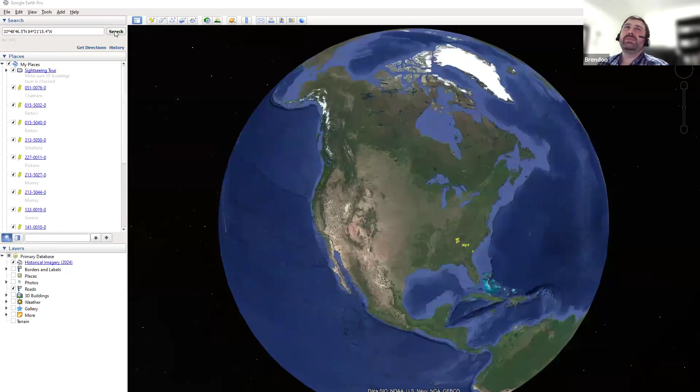So I have about 7 years experience now. Basically do bridges for a living. So I'm going to take you through a project that I did back in 2022, only about 2 years ago, when my previous company got a call from City of Atlanta when a bridge was on fire. I guess both times. So Cheshire Bridge has kind of been a lovely little part of my life that I keep getting paid for over and over. I'm going to take you on into Cheshire Bridge. If you don't know where it is, it's on the northeast side of Atlanta, kind of in this location.

Of course, this is the finished product. You got a lot of businesses here. The main thing that's kind of different about my structural engineer experience is I think about the whole site and the impacts on the community that follow, as compared to vertical construction or vertical structural engineering, where you think more about the building itself. I think about the site and everything that's included. And unfortunately, that includes weather events as well as people.

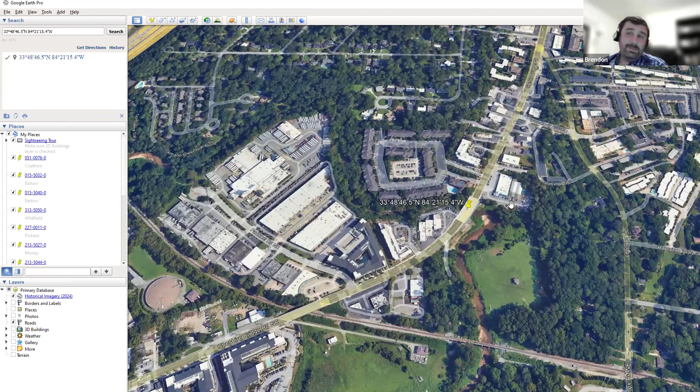So a couple things when you think about a bridge design are the different impacts you're going to have. For example, on the side you have some businesses, you got a little greenhouse for Pike Nursery. You have the EPA right here with their different sensors and systems in place for flood control. You have schools up the way, hospitals, public agencies like firefighters, police force. And you really want to make sure your design accommodates your community. So definitely not structural analysis, but keeping that in mind was the big thing. City of Atlanta came to us basically saying we need a bridge ASAP, it just burned down.

And when a bridge reaches about 4,000 degrees, it kind of melts everything in between. The previous bridge was from about the 1930s or so. It was supposed to be replaced in the late 90s. This one, of course, is brand new.

Due to funding and grants and such like that, we went ahead and said, we're going to replace this bridge, close the road, which was not super preferred, but we couldn't really save the structure that was on fire and do the whole loads analysis and everything like that.

This was technically a design build project, meaning that you design it and build it at the exact same time. On the engineer side, it's a little bit tedious because you have to design it from the ground up versus in a traditional design, you design it first, then you bid it, and then you build it. So instead of a top-down design, you have to design from the bottom up.

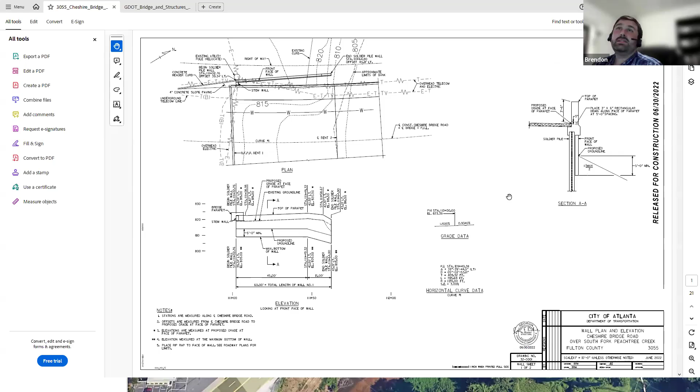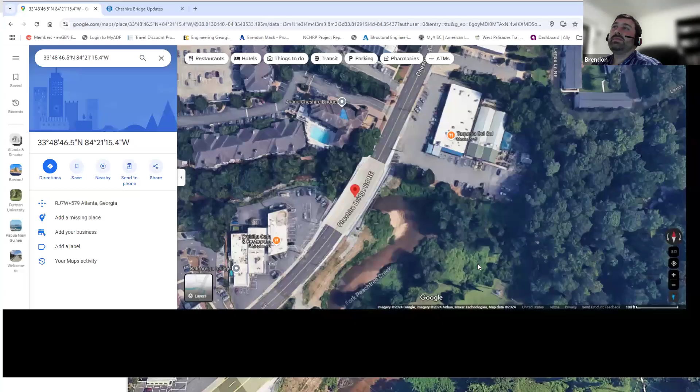So I'm gonna show you the plans. All right, so at the end of the day, you kind of have to think about your span arrangement. You kind of have to go over the creek bed. I'm just gonna grab a different map. So when you're doing a typical design, you want to think about, can you span the creek? Also, the Environmental Protection Agency says that we cannot put piers in the water if we can help it. So we do have to span that.

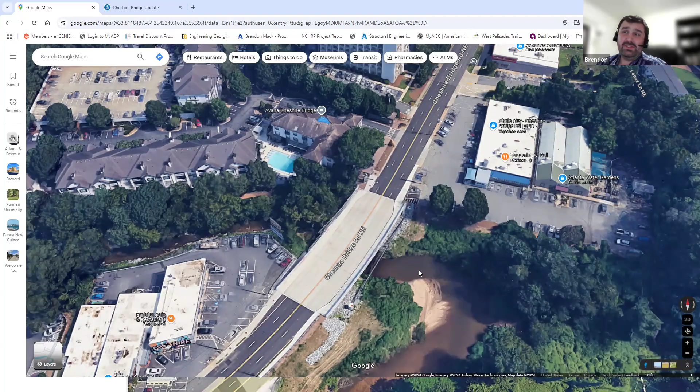Another type of engineering that we do have to conduct in this analysis is a hydraulic analysis. So thinking back to your fluids and your hydraulics, you have to think about conduit flow. Is it turbulent? Is it laminar? What's the effects? If this area floods, where does it go?

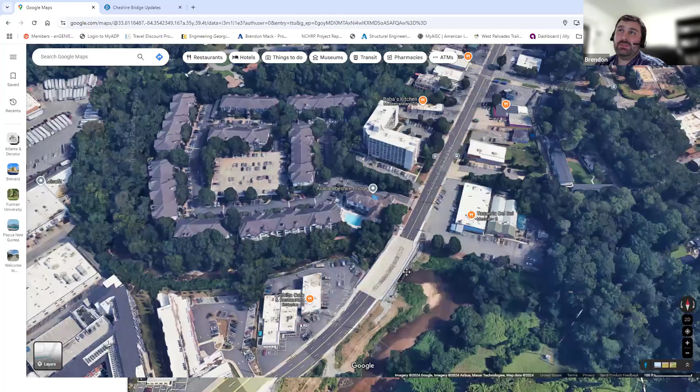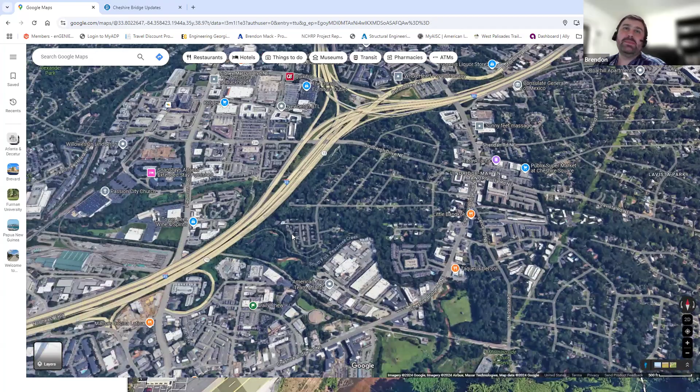So if you zoom out a little bit, and I'm going to change it to, here we go, I'm going to do the terrain. So if you look out at this thing, this is South Fork Peachtree Creek. You have the creek running down this way, and you can think about when this thing floods, how's it going to react? And you have to make sure as a structural engineer, when it floods, concrete, of course, does great underwater. Don't get me wrong, but what doesn't do good underwater is the cars that go over it.

If you think about bridge engineering, you're making a fancy table for cars. So at the end of the day, your Hot Wheels, as a little 5-year-old kid going across the table, can handle it. If you flood the bridge deck, the cars are probably going to go wild. So you got to make sure that the bridge is above your 100 or 500-year storm. So a little background history on it.

That was on purpose. This isn't a seismic zone for City of Atlanta. Also, the soil was not that great either. Most of the Piedmont region is just not that great because as the creek is washing through, it's washing away all the soil that actually protects your foundation.

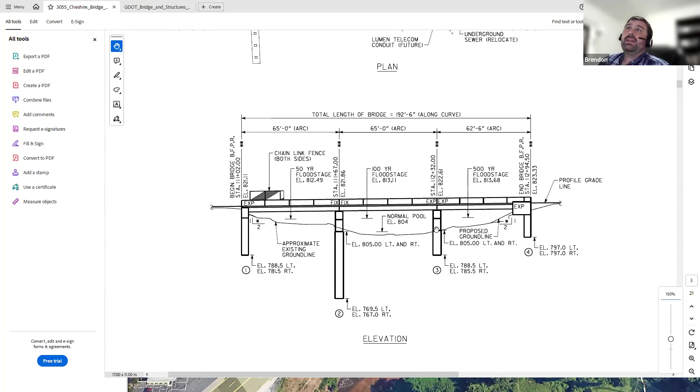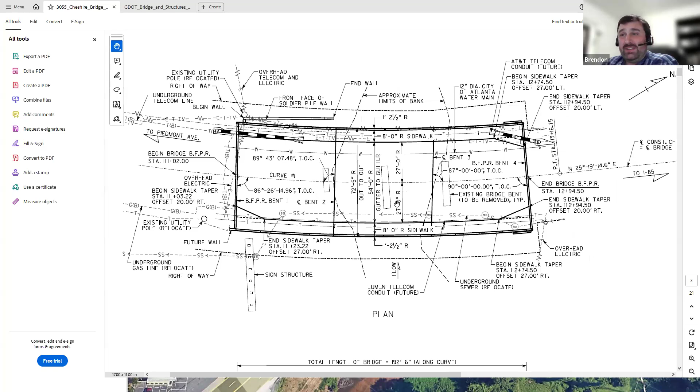So, just to go over the creek, I know this is a lot of little lines and call outs, but this is the approximate banks of the creek. We tried to ensure that we were outside the banks or at least close enough. Because this was design build and we had to make a fast decision within 4 or 5 hours or so, we made a 3-span arrangement. At the end of the day, this could have been a 2-span or a 1-spanner and just go really crazy and boost the road up. But in that case, it just didn't happen.

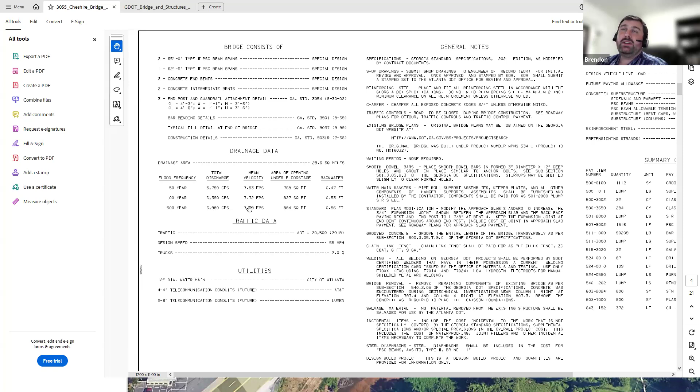Furthermore, there's some more general notes of your facts and figures. You have your bridge consists of drainage data. You have really lots of different other things going on. This is kind of like back to your hydraulics class, your 50, 100-year and 500-year storm.

Formerly, this used to be called the infinity storm. This is your worst case scenario. You have your discharge rate, you have your mean velocity, all that stuff. The model that I'm about to show you does include that. Just for that worst case scenario, if everything gets flooded, then you're completely still okay.

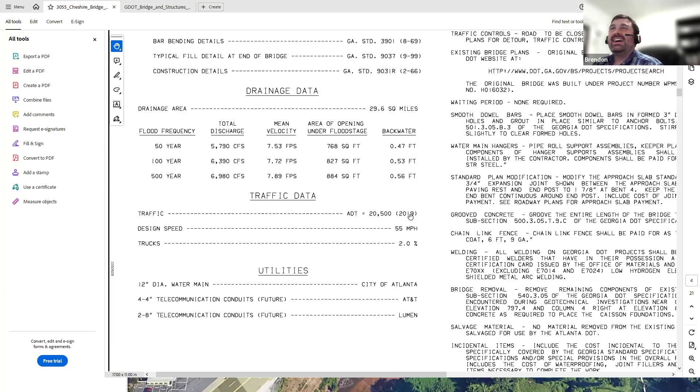This is the traffic counts from your traffic engineers. Since you're civil, you're going to be dealing with all types of civil. So your project partners are probably always going to be project partners in some kind of way. We posted this at 55 miles an hour. Probably should have been 45. Do people drive more like 80 miles an hour? Yeah, that's up to them.

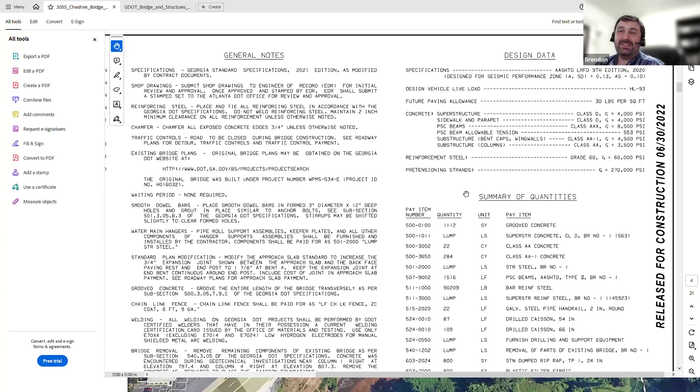Fun fact of the day, if you drive your car along a bridge with a barrier, you are only protected up to 45, 50 miles an hour. And if you drive over 50 miles an hour, it's not ensured that you'll stay on that bridge deck. Just letting you know. So just go the speed limit if you can.

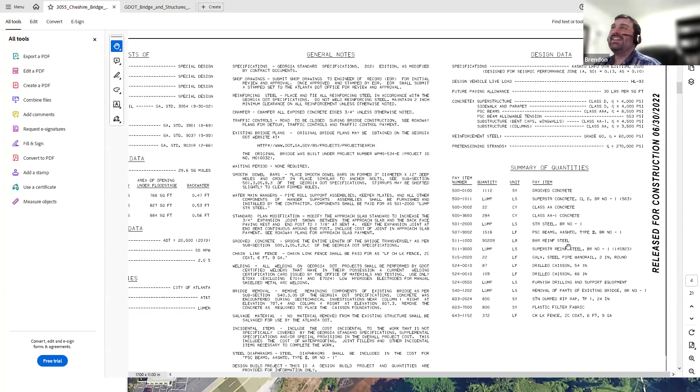And then all your different notes telling the contractor what to do: what specifications to have, shop drawings, reinforcement steel, what type, clearance of steel being 2 inches at all times. That's just kind of a rule of thumb. Existing bridge plans, dowel bars, groove concrete. There's a chain link fence on this. Make sure people don't fall off.

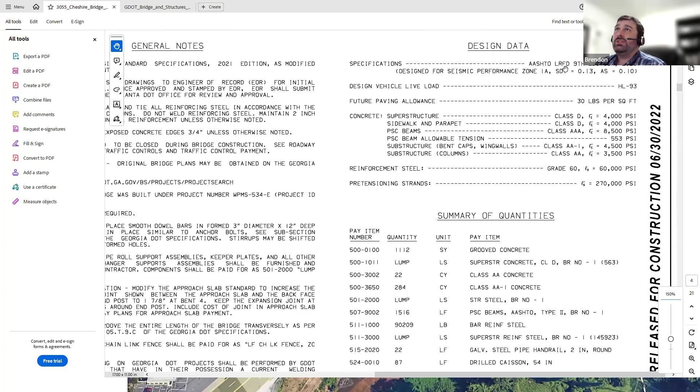How do you weld? You should have a certified welder from Georgia, nowhere else. Yes, we are taking out the bridge. No, there's no salvage material, et cetera. And a little bit of quantities that, of course, can change. And then what kind of concrete we're using in our design. So we specify this way ahead of time.

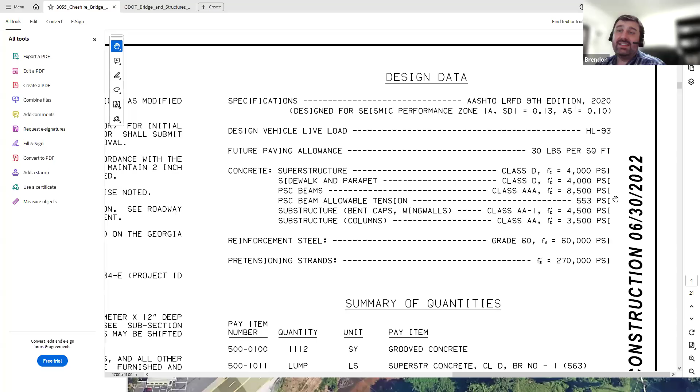And we tell you that, yes, your superstructure design, meaning your beams from your bearings all the way up to the bridge deck, is 4,000 PSI. And then, of course, everything below has a different specialized design. Your reinforcement steel in bridge world is always going to be 60,000 PSI. Your pretension strands are always going to be 270,000 PSI, just for this type of design. You do have to keep tension in check because our strength, no pun intended, is going to be compression.

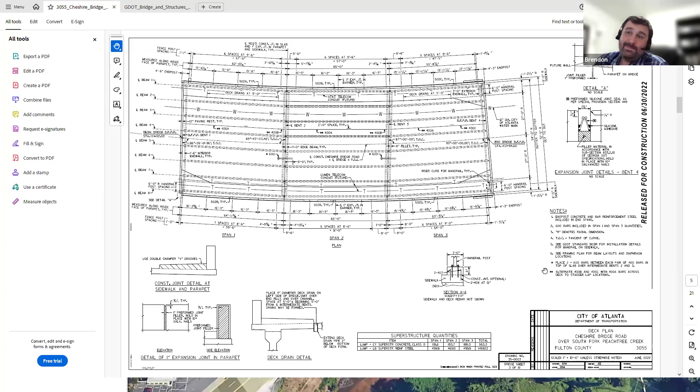So this is kind of your little layout. Again, you're making a fancy table for cars. So how do you do that? You put beams across the bridge deck. Not to get into too much, but we kind of have to tell the contractor everywhere everything goes. This one was a little complicated because it's curved. On a bridge, everything is unfortunately curved on the geometry, but everything is straight underneath. You can't make curved concrete, unfortunately. You can make curved steel, although.

So this is kind of our typical section. If you think about a typical section, I think of it like French bread at the Publix bakery. You take a little slice out, and there you go. You're looking at it. It looks great. It's ready for butter and peanut butter. I'm a peanut butter fan. So you kind of look at it.

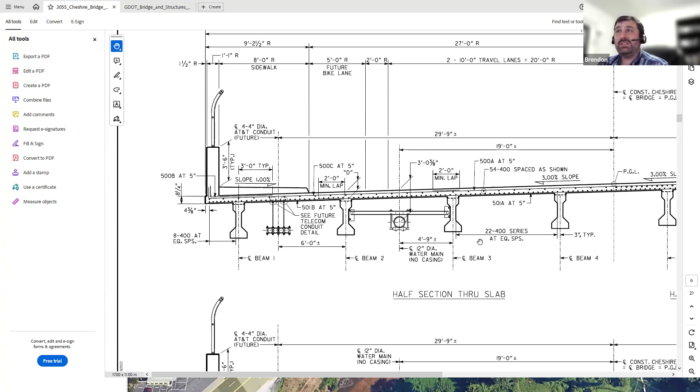We're detailing out a couple different types of utilities. On this bridge, we have a 12-inch water main, and then we also have future conduit. In this situation, we had telecom. We just put conduits out. Hopefully they'll put it in one day, but we just had to accommodate. So sometimes you have to accommodate for future use.

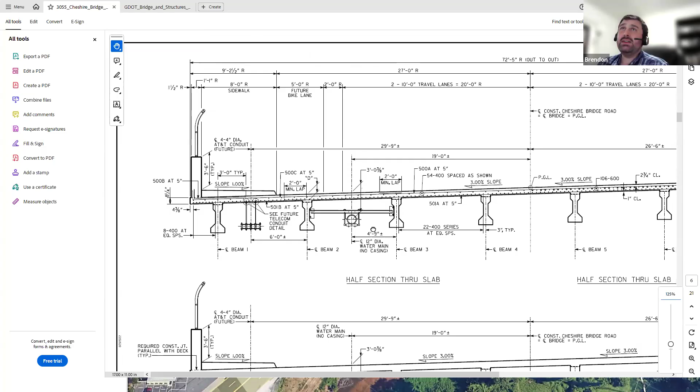City of Atlanta definitely wanted an 8-foot sidewalk with a bike lane or a shared shoulder bike lane on the side. That's just kind of for future expansion later with the Atlanta Beltline coming through. And of course, your typical two 10-foot lanes on each side to accommodate traffic due to over 50 miles an hour. We have to do that. That's from the AASHTO Green Book. So if you're over 50 miles an hour, usually you have to have 10-foot lanes, at least. Highway is, of course, 12-foot.

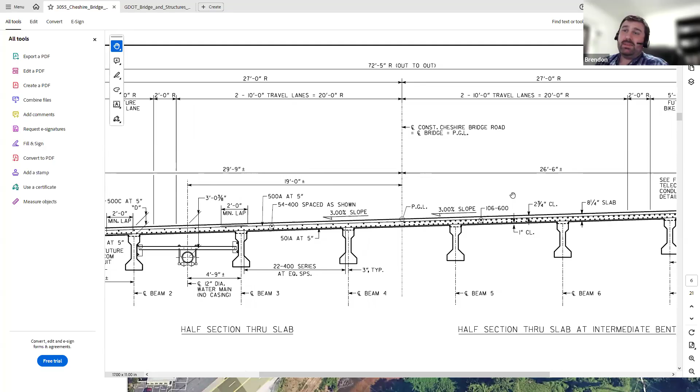Same thing on this side, same exact thing. Symmetry is your friend when you're doing a bridge, especially bridge analysis. So if you can do it once, you can do it once. If you do it 3 times, probably not going to be that efficient in your design. So any way you can make it more symmetrical, the better.

Of course, in this one, this is a lumen conduit. It's a little telecom as well. Don't know why they just wanted inserts that way. So to this day, I have no idea.

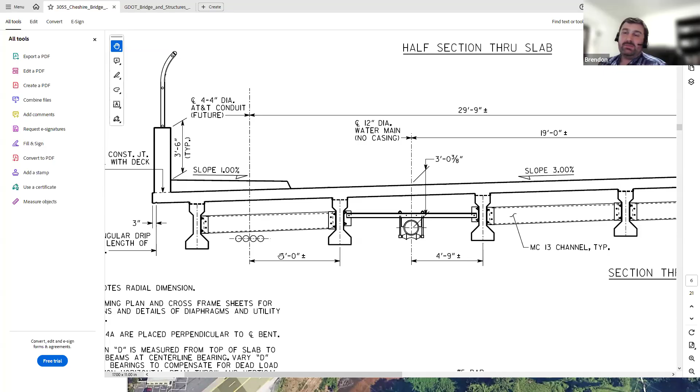So let's just say you put the beams up, and you get a bunch of rain and everything floods, you want to make sure that your beams don't sway back and forth and fall off the bridge cap, because that's happened. Each beam is, I might be wrong, but I think each beam is about $150,000 to $250,000. So you don't want anything bad to happen to them.

So calling up the fabricator saying, "Hey, can you make another beam for me?" is a really bad conversation to have. So diaphragms are here, and then you get to edge beams.

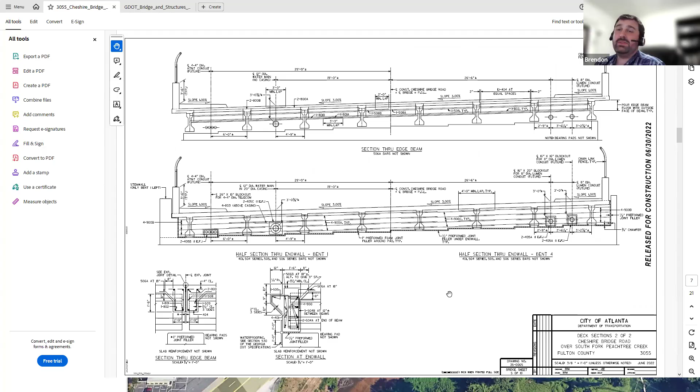And this kind of gets a little finicky. An edge beam, an end wall, and a diaphragm all have the similar purpose of keeping everything in line and keeping everything in conjunction with each other. To be specific, an end wall is at the end of the bridge. It's an end wall, literally. So engineers weren't that clever in naming this thing. A diaphragm is in the center, mid span of each span of the bridge. Not to have a tongue twister, but it's at the mid span.

And if you think about an edge beam, so we have the end walls on either side at the end locations of a bridge, a beginning or an end is at the same spot. So an end... Can you tell students a little bit more about diaphragm? They just learned the diaphragm as the floor. Oh, okay, yeah.

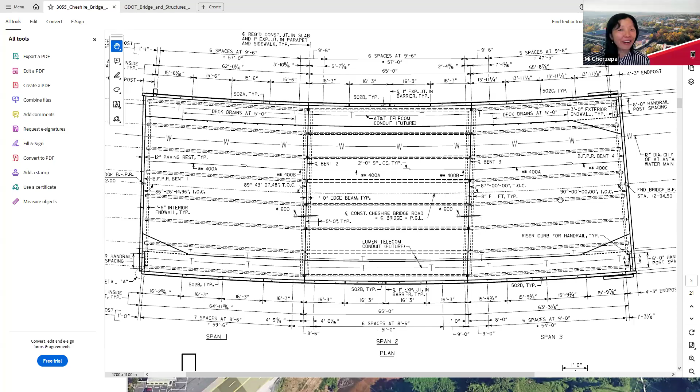So you have floor beams, which is very specific, and then you have diaphragms. I kind of think of a diaphragm as what keeps, so you're standing up and your diaphragm goes out, you usually hit the floor. So you usually have to keep yourself up. It does the same thing for beams and the bridge itself. So if you think about the anatomy of a human body, it does the exact same thing for a bridge, just to kind of put that concept together.

And Giuseppe, did I explain that right? So the diaphragms in this case are the floor beams that they see, it's the lateral load path, not the floor in this case. It's really referring to these beams, floor beams that Brandon talked about. Yeah. And if you kind of think about a diaphragm, you're kind of making a concrete sandwich in a way. You have your beams going all the way down, and then you have the interlocking pieces all in between.

And you kind of have to think about anything that's lateral movement, you have to keep that in mind, because impact loading is always kind of a thing. If you have an 18 wheeler going across your bridge, it's going to sway and bend and deflect and everything else. So you want to make sure those diaphragms are all put in third sections all the way down.

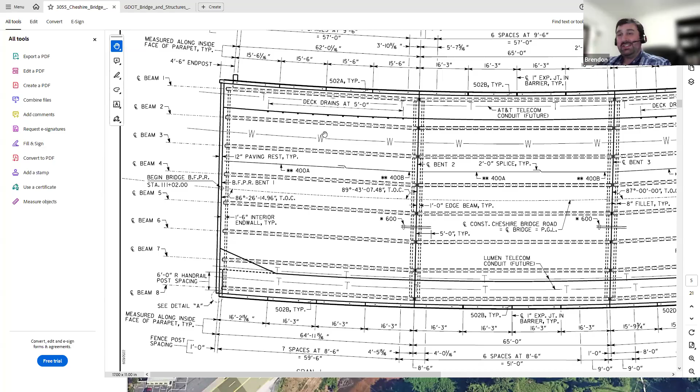So kind of like in this design, if you go from begin to end, I have an end wall, go midway through, you have a diaphragm, and then you go to the next span, which is right here, you're gonna have an edge beam. All diaphragms, the exact same purpose, they're just a little bit different.

So if you go to span 2, you're going to have an edge beam, you're going to have a diaphragm, then you're going to have another edge beam. And of course, at the end, you're going to have an edge beam, a diaphragm, and an end wall. All function very similar, but it just depends on where you are along your bridge deck.

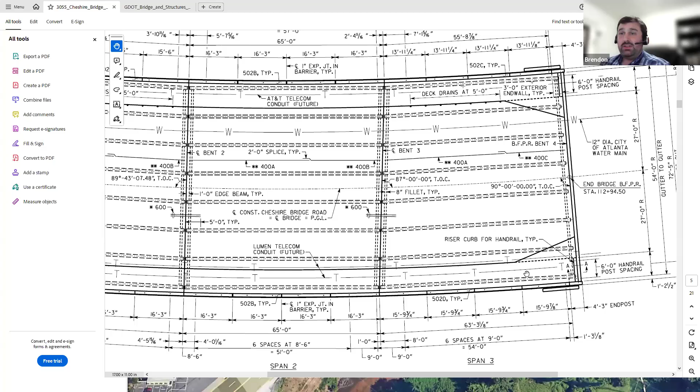So on here, if you can notice, an edge beam: if I go in between two beams, you're going to have two number 5 bars on top and bottom, and it's going to go in between each beam to keep that lateral movement in mind. As compared to if I go down to an end wall, it's going to be all the way down. It literally physically works like a retaining wall, keeps the soil back, but it also keeps the beams interlocked in between each other. So it has a multi-purpose.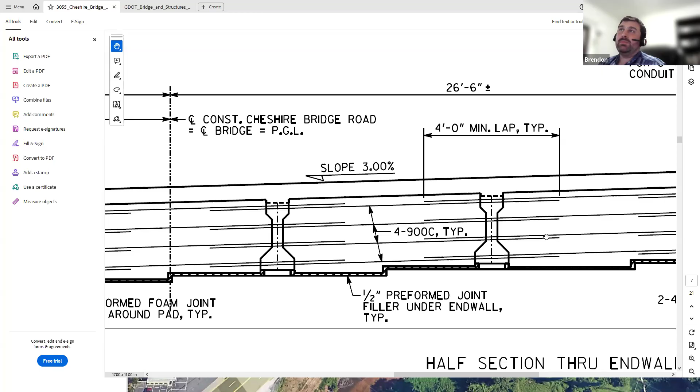If you really love a nice good cut section, this is what an edge beam looks like. So you have a beam coming in, another beam coming in, and it fits in between each piece. So when your car goes all the way down, your car is actually going across this expansion joint across your edge beam, if you think about it.

Whereas compared to the end wall, meaning this piece over here, you have bars coming in, you have a beam coming in sitting right here on top of your end bent cap or your abutment. The vernacular is all a little different, but it's keeping the soil back, it's keeping the approach slab on there, but it's also keeping the beam in place too, so it doesn't sway back and forth from lateral movement. So if you have those fundamental theories there, it all works out just fine.

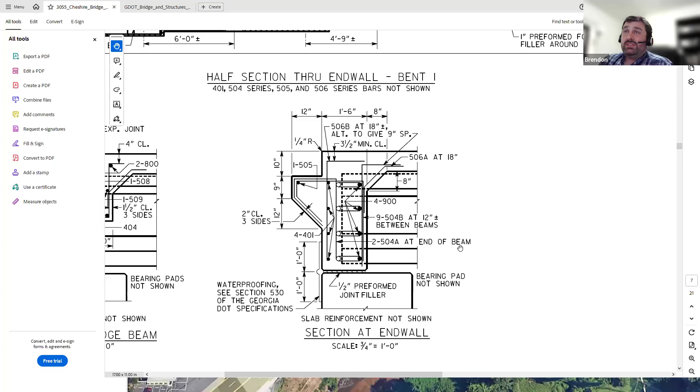The nice thing is that most DOTs standardize these kind of details. So the nice thing in the bridge world is it's like a copy paste. So it just depends on what kind of beam you're using. Of course, we love all kinds of details, but I'm going to skip this. This is more of the superstructure details. You have fencing, you have sidewalk, all kinds of different things. And then you have your different hangers.

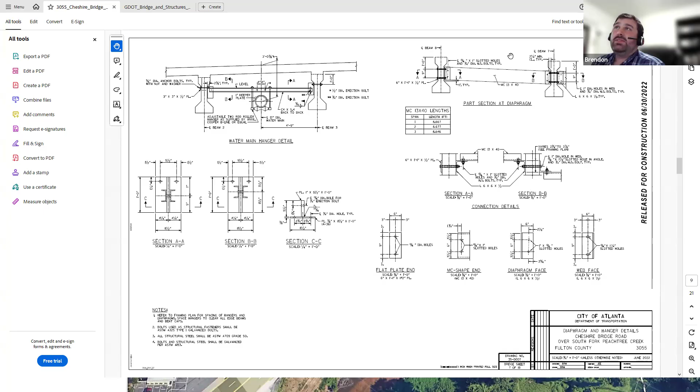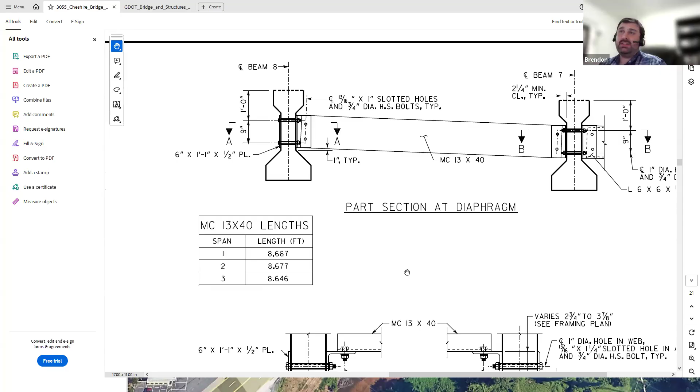So this is our diaphragm piece. We're specific on what kind of steel pieces we're using. If you want to look in yours, I call it the steel Bible, your steel manual, latest one. We used a 13 by 40 MC type section, meaning two L brackets together, and it's one big giant piece together. So the beam itself, here's a beam, another beam, you put a through bolt through, another through bolt, little L bracket, and then you have this big metal piece going through. You can visualize that.

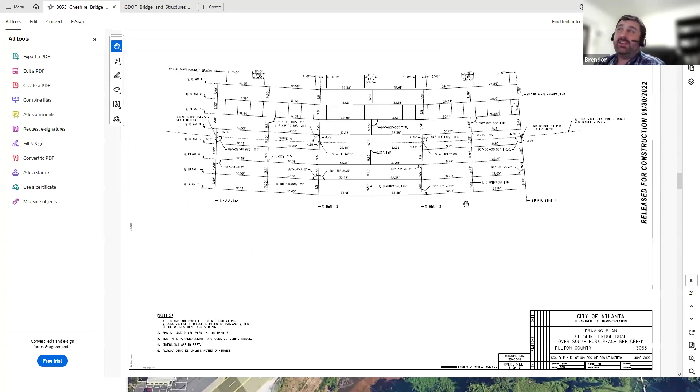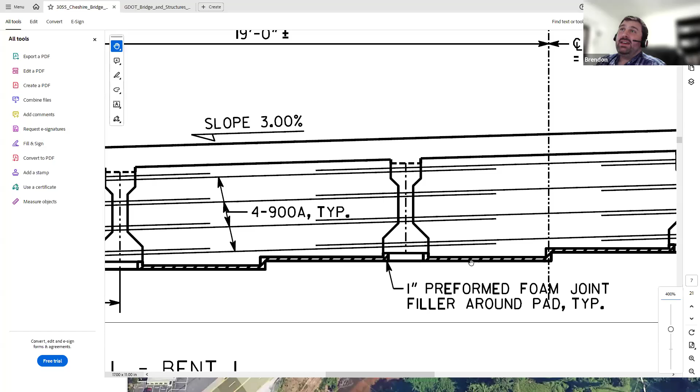So, of course, we got our framing plan and all that fun. The short sections, we have type 2s, more type 2s, and guess what? More type 2s, because we're going to make this easy on us. Because symmetry is our friend, we're going to use small little beams on a giant structure. Why not? And of course, our bearing pad. If you go back to your section, giving the anatomy of this bridge, you have your bridge deck, you have your beam, and then you have your bearing, and then you have your cap.

So if you go back to that, I might age myself 10 years, but if you go back to the age-old branch on a tree, tree in a hole, and the world goes around, back to that song, that's how bridges work. So you have to piece it all in different pieces.

So, any questions so far? Just make sure. I did have one question actually. Yeah, go for it. One second, please. Let me see if I can find it in my notes.

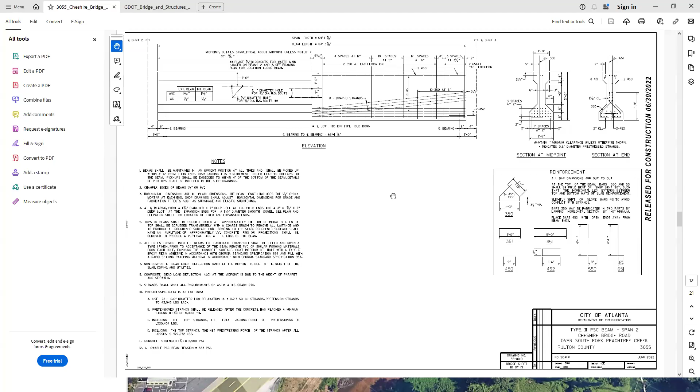They'll do that probably every 20 years or so, approximately. We'll specify 10, but they probably will get to it in 20 just with funding. I see. So you'll design and analyze with the paving already pre-placed onto the deck. Yeah. Okay. And we'll get into this more. So as you're putting more weight on the thing, since...

It's a pre-stressed girder, it's going to come in and it's already going to be kind of bent. And we'll go into that later on with the D dimension and the haunch. But as you're putting more weight down, it'll kind of slowly creep down to hopefully a frowning face style, have that nice camber. If you have a smiley face, believe it or not, it's actually bad.

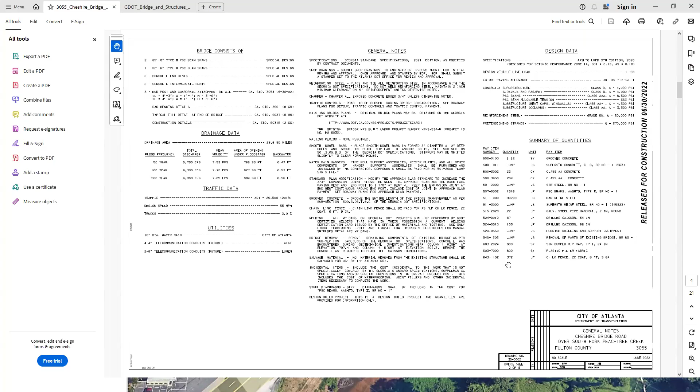Cool. Did anyone have another question? No? Okay. All right. Hopefully I'm not losing y'all. So yeah. All right.

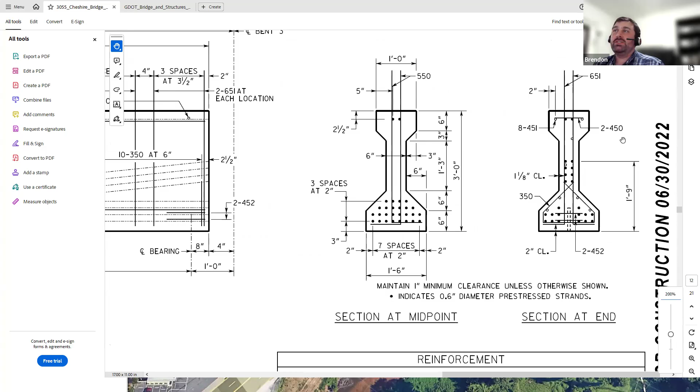So as you can kind of see, as you put this thing together, I'm actually going to go over here first. You have a midpoint section. So this section is from straight into the center. And then this one is going to be seen on the very end. And you'll see that in the model as well. As you can tell, these pre-stressed strands are going to be draped from the mid section of the beam all the way to the bottom section of the beam.

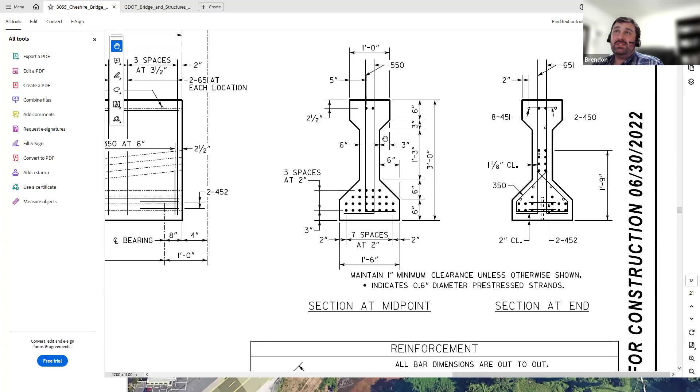As you see in the midpoint, there's no strands in the middle. And it'll look a little bit like this in the midsection. So of course you have, this is for tension and compression, and then you have your anchorage reinforcement around this area, going back to your materials class. And then towards the middle, as you can tell, your spacing gets more and more. That's on purpose, to get that nice moment curve going on.

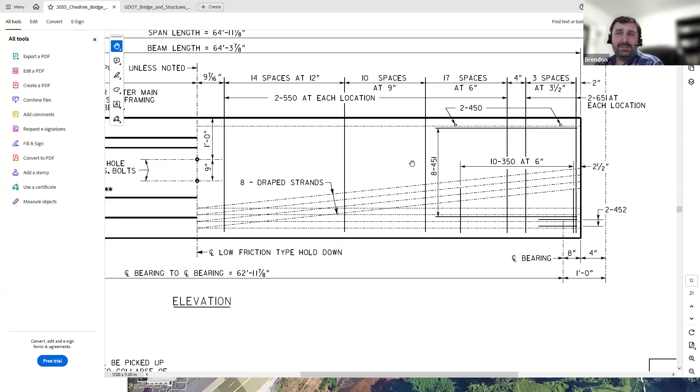Back to, I think y'all still call it strength of materials, right? I think, okay. Some universities call it mechanics of materials, and I always get really confused.

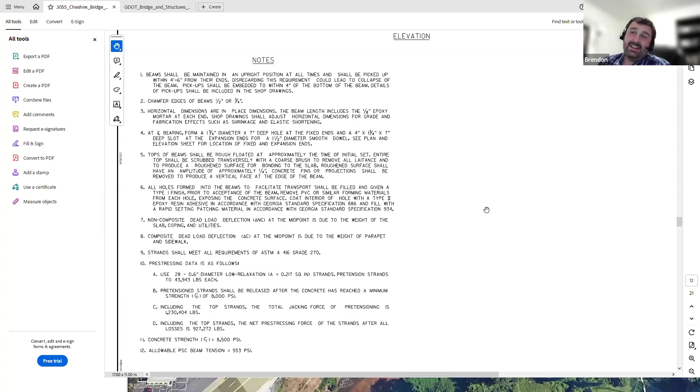And of course, all the different specifications, and you'll have, hey, per fabricator, make sure all the chamfered edges are between this tolerance, and make sure the bearings are for this tolerance, and make sure everything is good. As a structural, you'll give it all to the fabricator, and the fabricator will come back and say, I can build it better, and that happens every single time. So, as long as it meets your criteria, it's completely fine. And of course, the different diameter holes for the diaphragm itself, you prefab that in.

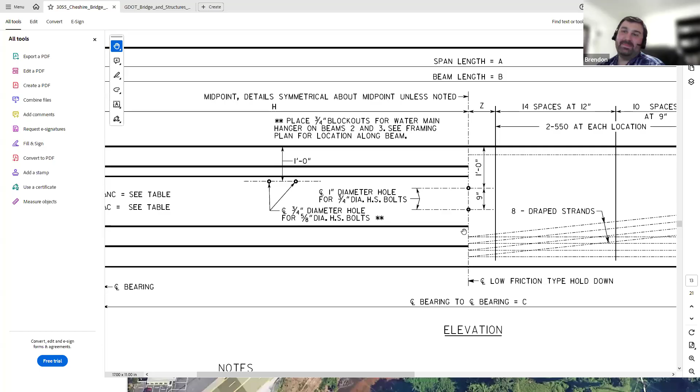And also, don't be deceived by this. I actually had a question on this a little while back. Don't be deceived. They're just PVC pipes with concrete around it. You can build this at home. I wouldn't recommend it, but you can build this at home.

Another thing, and I'm actually going to go to span 3 on purpose, just because it's a little easier. At the very end, you have the pre-stressing data. You're going to have your design as follows. You're going to have 28 half inch, 0.6 inch diameter, low relaxation strands all the way down. And make sure you have your release strength as 8,000 PSI. Your final strength is going to be 8,500 PSI.

And then of course you have your allowable tension per your design is 553. Just telling the fabricator ahead of time that if anything goes outside those limits, do not give me that beam. And you can reject beams.

Of course, from the top strands including, you have jacking force. So when I say jacking force, you have forms on left and right. They pour the concrete in the middle with all the different rebar cages in between and all the pre-stressing strands, and they're going to physically jack it up to 1,230,404 pounds. If you can think about how much that is, it's a lot of pounds.

And then including the top strands, the net pre-stressing force after losses. So as the person cuts the ties on the pre-stressed strands, it's going to release a little bit, and it's going to actually lose a little bit just because the material is not there yet.

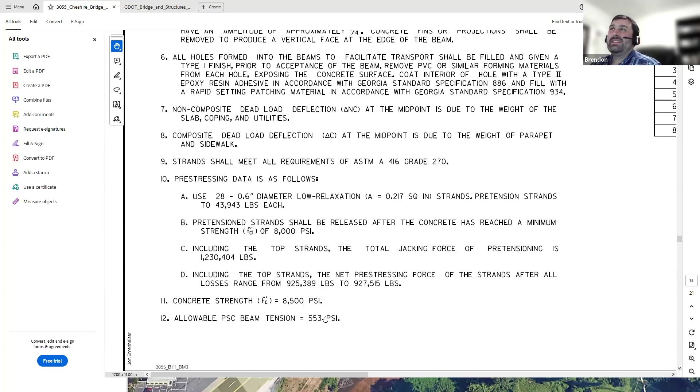Turns out you probably get all that theory in there, to be honest. And we probably won't go into substructure just because of time, but if you love to read rebar, this is the design. I'm going to go to span 2 or intermediate bent 2 on purpose, just because this is hard to read. I didn't do the best at drafting this.

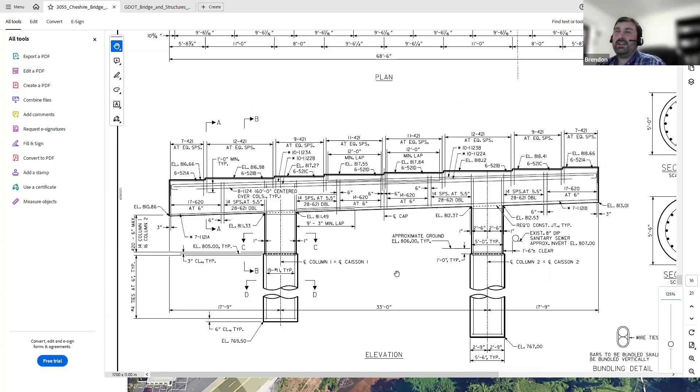So in the ground, you have your caissons or your drilled shafts at 5.5 feet in diameter. And then on top of that, you have columns, and then you have a big giant cap. If you look at beam design, if you look at a column, it's a beam. If you look at a beam, of course, it's a beam. If you look at a lot of your fundamental structural concepts, if you understand beam theory, the whole thing makes sense. You kind of understand your moment and shear curves, everything makes sense. So if you keep that in mind, everything kind of coincides with each other.

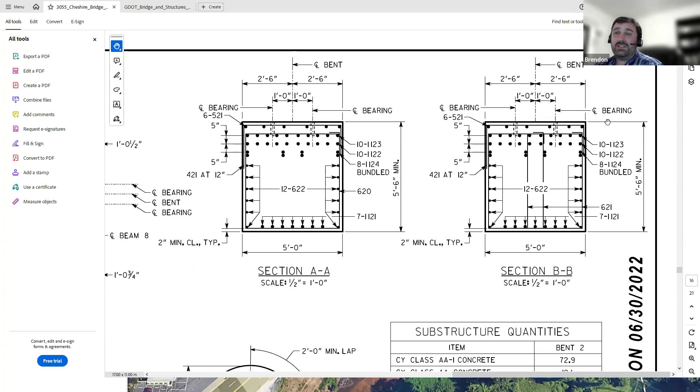Of course, you have the bird's eye view, you have the cut view looking right at it. And then, if you want to cut it open, that's what the inside of the sandwich looks like. If you want to look back at your concrete analysis and you have your stress block, this is exactly what we're talking about.

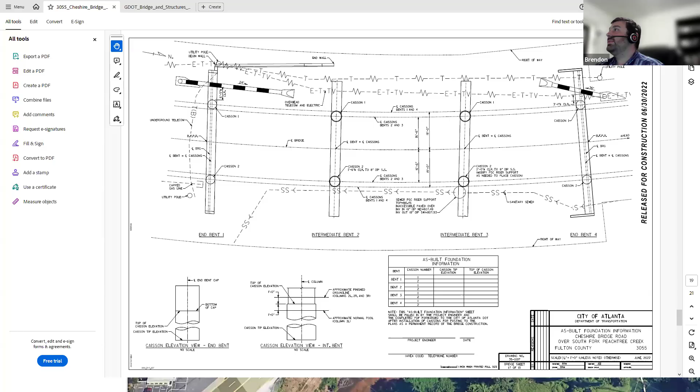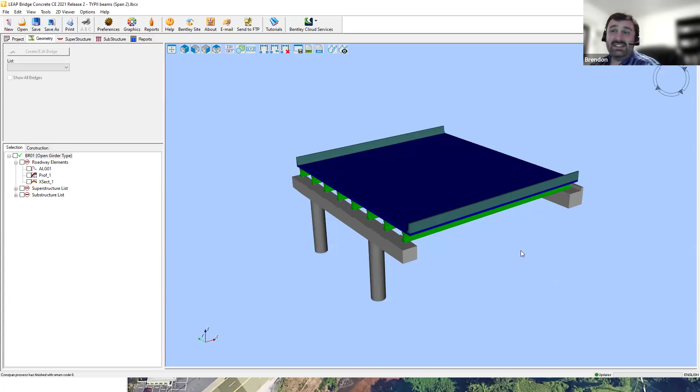All right, so I'm gonna go to the model, and it looks a little daunting, but anyone can do it. If I can do it, anyone can do it. Let's see, and I want this one. So if everyone could remember what this looks like, it's gonna be exactly the same thing. All right, actually, I'm gonna go back one. All right, so we're gonna do span 2 just because it's easy, and we're gonna win this race because it's over there. If you look at these plans, it should look like that. If you look at the typical section with the beams like that, oh look, it looks like that.

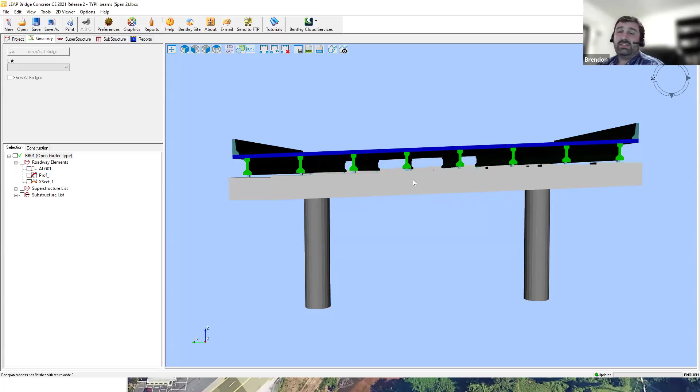So this program is called OpenBridge Designer. This kind of takes a formal approach at modeling. It's almost based off a STAAD program. You have finite element analysis built in all in here. It's very user friendly. It's made by Bentley Systems, which is a love-hate relationship for me because the customer service kind of is, you know, but their manuals and their engineers and all our nerdy people in the background do a really great job at making this stuff happen.

Also, which makes me very happy, you can kind of see all the pre-stressed strands in there too. It's kind of cute, very demure. I'm gonna look at the side here, so if you look underneath, I think that kind of looks like a deck section to me, like a deck plan. So if you look underneath, everything's kind of there. And of course, over here, you have your end bent cap. So when I say cap, it's a cap.

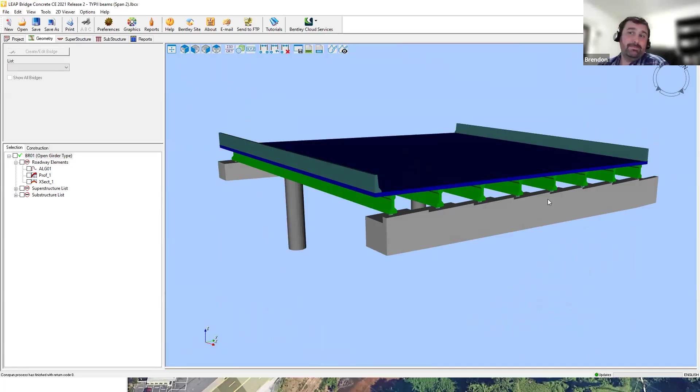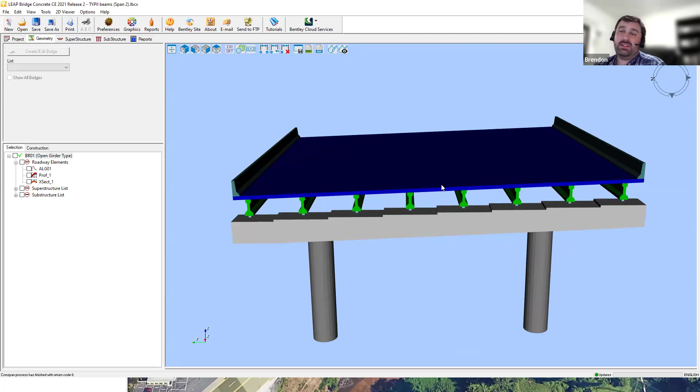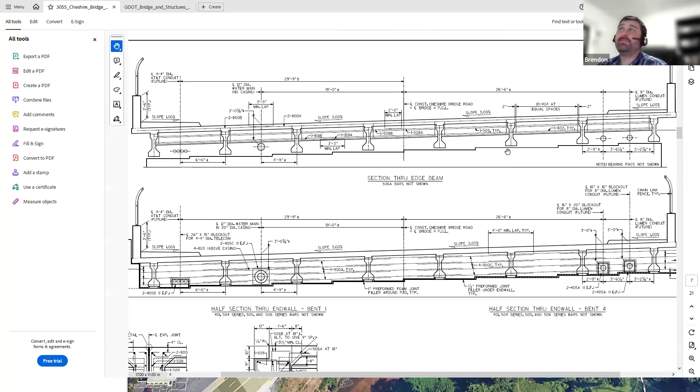Everyone likes a visual. In this case, we're going to assume that the truck can be anywhere along your bridge deck, and placement of your truck can be on top of the sidewalk as well. So kind of like back to your typical section. Your conservative design is going to be a truck can be here. It can be here, here, here, all the way over here. So worst case scenario, we're probably going to have about 6 trucks just in case. So, all right, let's get into it.

Pre-stress design. I put in all my sections, unfortunately it doesn't like it. So this is who created it. So we need to define everything. So 72 feet wide and some change. Gutter to gutter is going to be 70 feet. This is an assumption, of course, including the sidewalk. I have to say that over and over because some people get a little bit confused on what I'm trying to do. We are at a slight skew, 1.25 degrees.

Anybody? HL, anyone? Don't be scared. It's not 50. 93. So HL 93. Okay. So our HL 93 truck, which is basically your full-sized U-Haul when you move from UGA to your full-time job. Or if you don't have to move, that's even better.

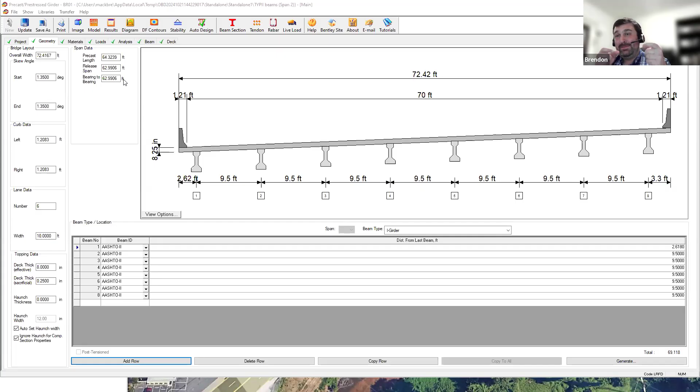And then we have, of course, our calculated overhang. Since we are along a curve, it might vary just a little bit. You have your precast length, you have your release span, and then you have your bearing to bearing. Your release span and your bearing to bearing is going to be the same. If from the fabrication yard, from bearing pad to bearing pad, your beam is bigger than that, it's not going to fit, unfortunately.

The next part of the program is that we have to get all our materials in there. So that's your material science. We're assuming that our girder release strength of 8 KSI is going to be 153 for your AASHTO LRFD code. Girder final, of course, is going to be 8.5 KSI, 154. And then your deck is at 4,000 PSI at 150 pounds per cubic foot for your weight. Your elasticity is also calculated by the program. Make sure you use that 120,000 square root formula.

Your Poisson's ratio is going to be 0.2. Your thermal coefficient is always going to be the same. Elasticity, of course, is in there. And your Fy of steel is always going to be 60. Okay. This is going to be draped. So our depressed factor is right at 0.5. We're just depressing it right at the middle. This can vary from 45% all the way to 35, depending on your design. Next is the type of low-relaxation steel that we use in our design.

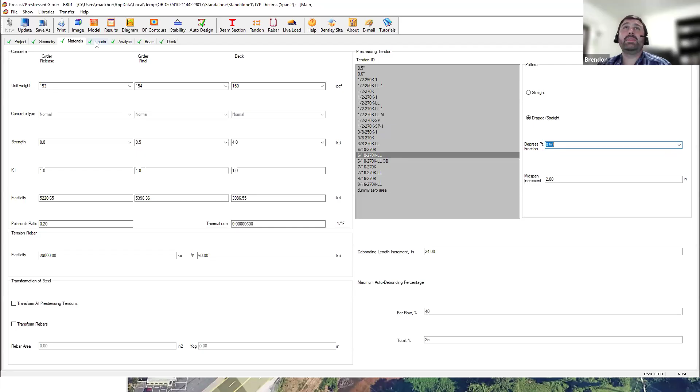All right, loads is the part that's a little hard. You have to get everything down from your telecom to your conduits to your hangers to your sidewalk, left and right. Your future wearing surface is going to be 0.03 for that magnitude. Then you have the haunch, which is calculated later; you do that iterative process back and forth to fine tune it. You get your left and right parapet, your overhang added slab because we had to beef up the slab on the exterior, and your SIP, your stay-in-place forms, metal decking that keeps the concrete from going down.

The diaphragms are also calculated. You take your cube of concrete and convert it to your load of 0.2 kips or 0.4 kips, depending on where you are. On the exterior you don't have a diaphragm on the other side, so only 0.2. Interior, it's going to be 0.4. Remember, you're getting half of each side.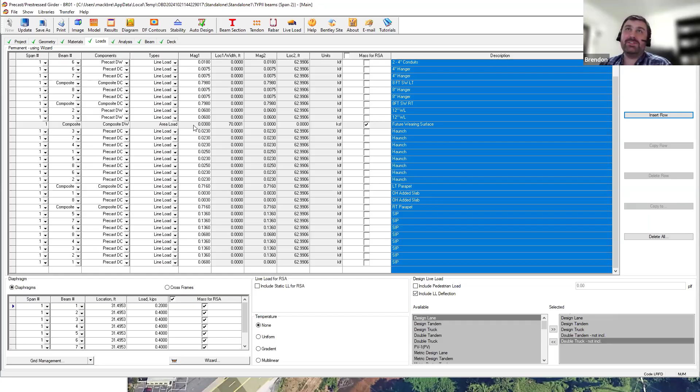In your process, you're also going to include your live load deflection. You keep your design lane, design tandem, design truck. This is just a bug of the program; it's a combo, unfortunately. I already ran this earlier, but we'll run it again.

Three things some students might not understand are haunch, release strength and draping, so if you can focus on explaining that, it might help. So your haunch, and I wish I had a better section, is that little itty bitty triangular piece on top of your beam. When you put your beam down, it deflects and goes around a curve as you're going from point to point.

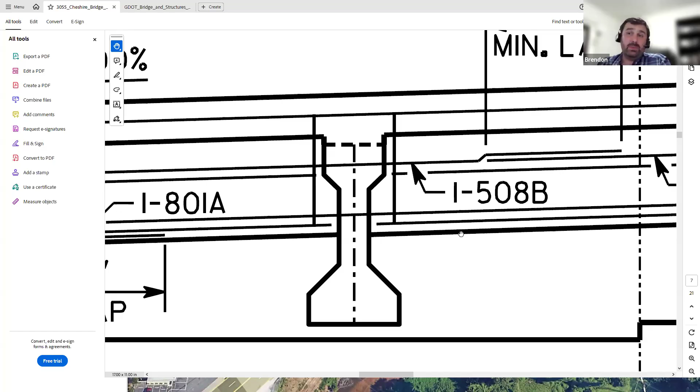We are assuming a simple span kind of analysis here. So this over here is not going to stay the same at midpoint. It's not going to stay the same on the other side too. Some states call it haunch. Some people call it D-dimension. Some people call it coping. Just kind of depends on where you are.

And the drape, you said draping was another one? Yes, draping and release strength. So draping, if you think of it like a tablecloth, you kind of throw it in the air and it has that little curve on the way down. That's what you're doing from point all the way down. In the yard, you're going to have it from point to point. So you kind of go from midpoint of the beam all the way down. And that's really to counteract that compression tension relationship.

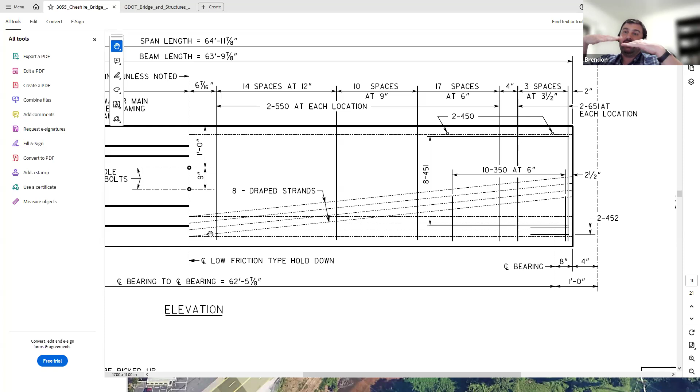For me, it was on the job training, but overall, if you kind of think about it, as you're beefing up your section, the more you go up, the more it can take. So if I took these all the way up here, it can take more, if that makes any sense.

Release strength. So release strength is basically from the yard to the site. It has to break at this amount. If it's too low, the beam will just fall apart. If it's too high, it also will just fall apart. So you kind of have to adjust between the two. If your concrete strength is too low, it also won't take its own weight sometimes, whereas if it's too high, the anchorage zone just explodes, like physically. It'll just crack, you know.

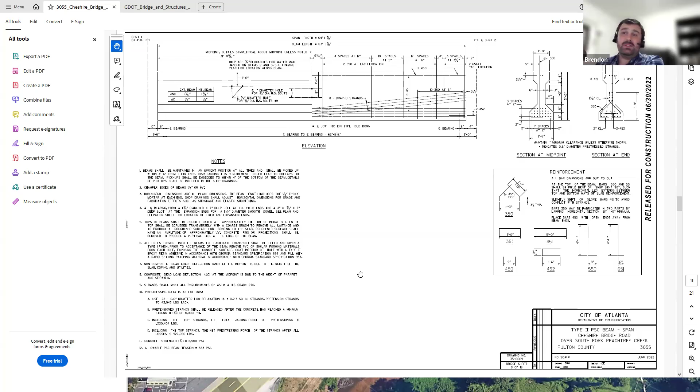Whereas final strength is going to be your final condition, final state, final everything. So after your 28 days of curing, plus then some, that's going to be your final design. So that's when you put the deck on and everything. Does that make sense? Thank you. I think the student will see the strand pattern in the analysis model.

Yeah. So in the analysis, if you're a number nerd like myself, you can kind of go from beam to beam. So let's just say I want beam 6 and I want the moment. It's right in the middle at midspan. So that's going to be your max moment at beam 6, service 1, done. And if you notice, and I would hope this is the case, over here and over here is the same number. If it's not, we have really big problems, and then you have a bug in the program.

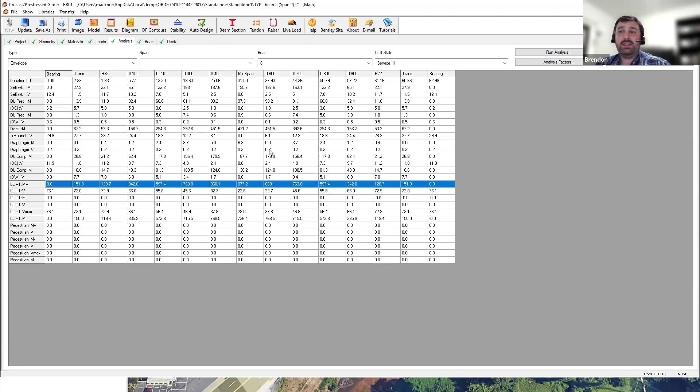So in structural world, by the way, this beam and this beam should come out to about the same, just being honest. This one and this one should be about the same. And you can go from there. I'm going to just take the second beam to the center. So initially you'll have your computed stresses off your program, and then you'll have your final stresses. These are going to be your limits.

So you have your final stresses, and this is telling you, at compression, this is your limit right here. Final tension, it should be pretty low. This is your limit. So for these specified inputs with your concrete strength, with the amount of steel that you provided, that should be the limit. And you can hand calc it. I prefer to use the computer to check me, but I still hand calc it. So final 2, you have compression strength, and of course it's going to be a little less on final 3.

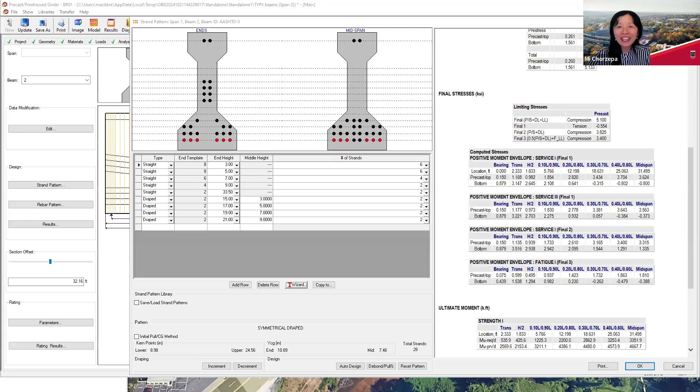Any student who took bridge design and had to do hand calcs, and the software just did it within a minute. They go through all the PCI design, bridge design manual, and do the problem one by one. Oh yeah. So they understand the whole process, and they see the software can do it in no time. Yeah. Hopefully.

No, it's just not going to do it. Okay, that's okay. It doesn't want to break. I've been running the computer hard all day, unfortunately, with different loading and everything. So, for example, if you take out, let's just say the top 2 strands, which I love to do, it'll show you that your limiting stresses on your final are probably always going to break. Whereas if you take all your draped strands away, usually you kind of need them.

Also, another tip for your pre-stress design: think of a cup, you fill it up all the way and you go into the bottom flange. That's usually how you do pre-stress design. The bigger your bottom flange is, the more capacity your beam usually has. So bigger beam, bigger problems, unfortunately, but it also can take on more loading as well.

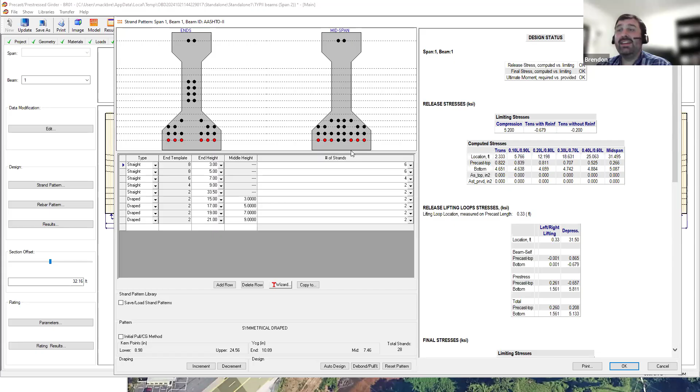The nice thing about this program is that you can auto design it, let's just say. Probably not going to make it. Probably have to beef it up on some sides. Let's just say, okay, I'll put two number 6s. Okay. That sounds very nice. This makes it almost too easy, by the way. So there's a lot of auto design features in here. It only gets you to your starting point. It doesn't get you to your ending point. So you have to fine tune back and forth.

And that's really all I have for structural analysis. I took you through the plans, through the area, through your beam design, your inputs, what you're looking for, your AASHTO codes, your GDOT structures manual, and then down to your final huzzah on the beam design and where you're leading to.

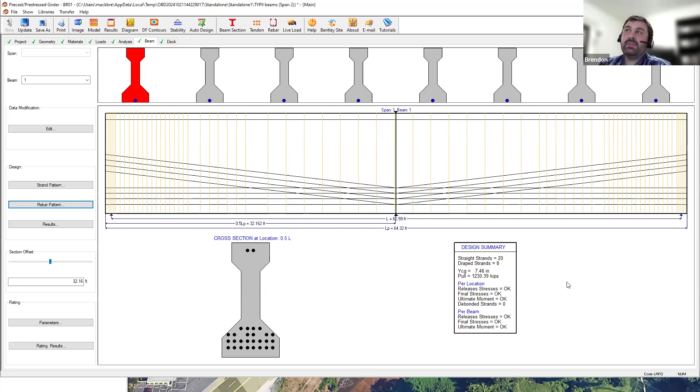This one had a lot of uplift and the soil wasn't that great. So the geotech told us the soil's not great; you want a lot of stability. It's also in seismic. You want to make sure you beef up your caisson so it can take the loading from below and above as well. Let's see, actually, just grabbing a substructure.

And there's another question from Muhammad about post-tensioning and diaphragm. Yeah, go for it. Muhammad, do you want to ask your question? Yeah, actually, I'm a bit interested regarding the pre-stress you were talking about. So, have you done any post-tensioning beam design? Then, how will you include the effect on the diaphragm while doing the post-tensioning?

I've only done post-tensioning one time, and it was with a PE, SE, very certified person. We don't usually do a lot of post-tensioning, at least in Georgia. Florida, maybe.

Florida, yeah. I think on the 425 project, I checked their reinforcement and their design to do the post-tensioning for the rods that go in through the beam. And I've also checked the process to do it, but I haven't actually physically designed it just because it's kind of a rarity. Okay.

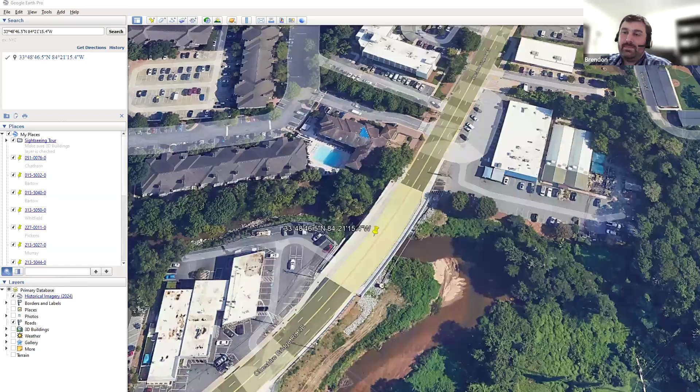Yeah, so the diaphragm is one member that you attach as kind of a stiffener. I think that might be an easier way to understand. X-bracing, I think Brendon was showing you, this member you attach between the girders provides stability.

And usually, structurally, just to be honest here, when you're constructing a structure of any kind, it needs a lot of bracing until you're completely done with it. So let's say you're making a building and you see all the different stage construction parts and pieces. Usually there's a lot of pieces and parts to make it all sway and everything correctly to build that structure.

Bridges are exactly the same way. So if you look at how a parking deck is put together, bridges are pretty similar. So next time you park the car, look around.

Are there any other questions? Can you tell us a little bit more about your company and any recruitment plans? Sure. So I'm gonna give my quick spiel. I'm not really good at it per se, but we are Gresham Smith.

It was founded probably about 75 years ago by two architects out of Nashville, Tennessee. Their bread and butter was hospitals. Now we've gotten into all different sectors. We're put together almost like a Google, where we have a bunch of different markets as different pieces and parts of the company, but we're under an umbrella called Gresham Smith.

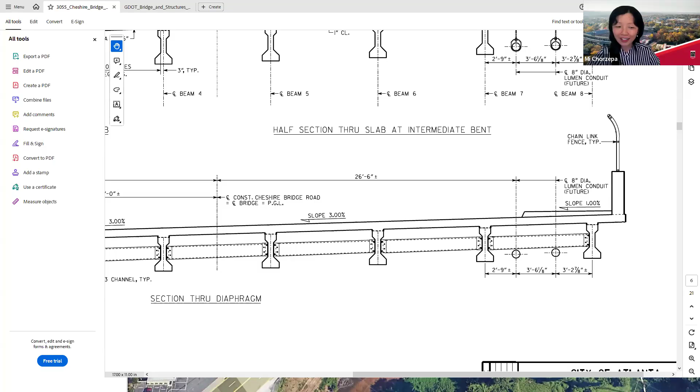One of the questions, like which offices have vertical structure positions? Bridge structure, vertical, anything. Yeah. So most of our vertical group is in Nashville. We're kind of sparse in between. We have Chicago, we have Denver, Nashville, and I think we have one person in the Midtown office. We're kind of hybrid, remote first, but then come into the office as we need to. Like personally for me, they say I should be here 3 days a week. It's probably more like 2, just depending on what location and what site I'm going to be on.

So vertical wise, if you're interested, I would say definitely apply. We're always looking for good people. And another thing too is that you don't have to be certified to maintain that kind of a position. Of course, that's part of your career. You should definitely get certified in the state where you reside, but it's not like you have to have it as an entry level. Of course, pass your FE.

Excuse me. Hello. In pavement engineering, we calculate the load with different criteria, right? Here also you are dealing with the traffic. So why here are you following the most traditional way rather than going for the pavement engineering approach? Is there any special reason here?

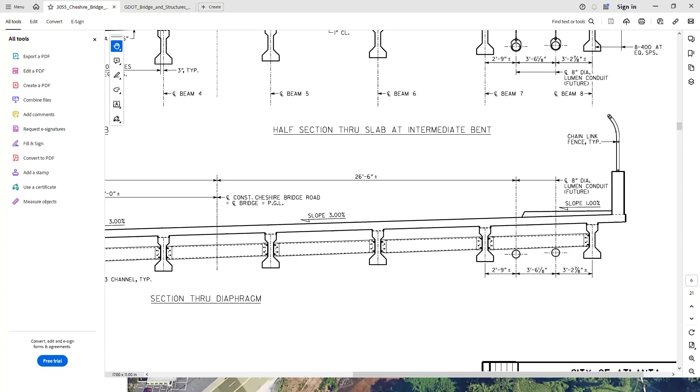I'm gonna give you an answer. It might be vague, unfortunately. It all depends on your situation. Usually we calculate it in the traditional sense, just because that's what the codes tell us to do. If you do find yourself in a situation where your traditional code doesn't apply, or you have a gut feeling, like if you're going to sign and seal, you want to make sure that this thing stays up. So the design life, for example, of this bridge is 75 years, which longevity wise, we're probably not going to be around when this thing finally fails.

If you find yourself in a situation where you might need a little bit more, let's just say climate change and resilient infrastructure have definitely been a huge topic for structural engineers. So everyone has been beefing up their structures or analyzing them in 2 different ways. And this might be way more information than you need, but every bridge that goes through the DOT's office also has to have an independent checker.